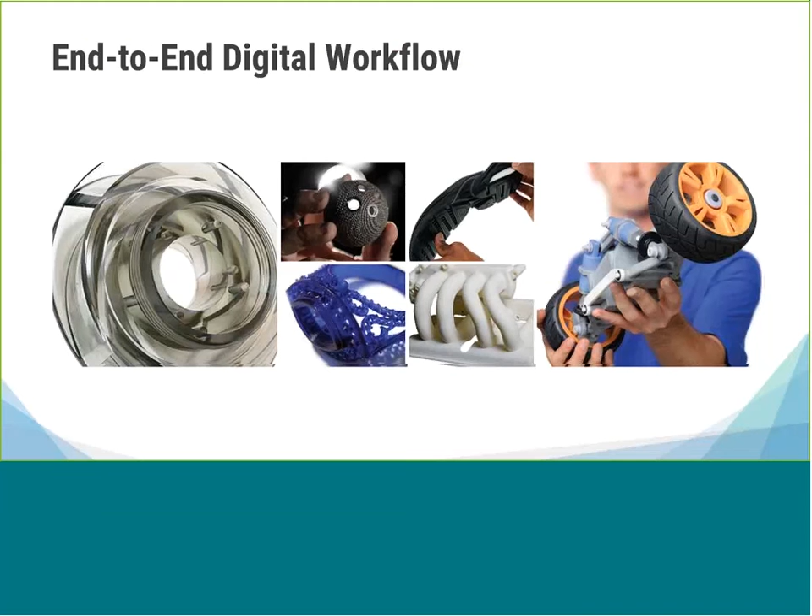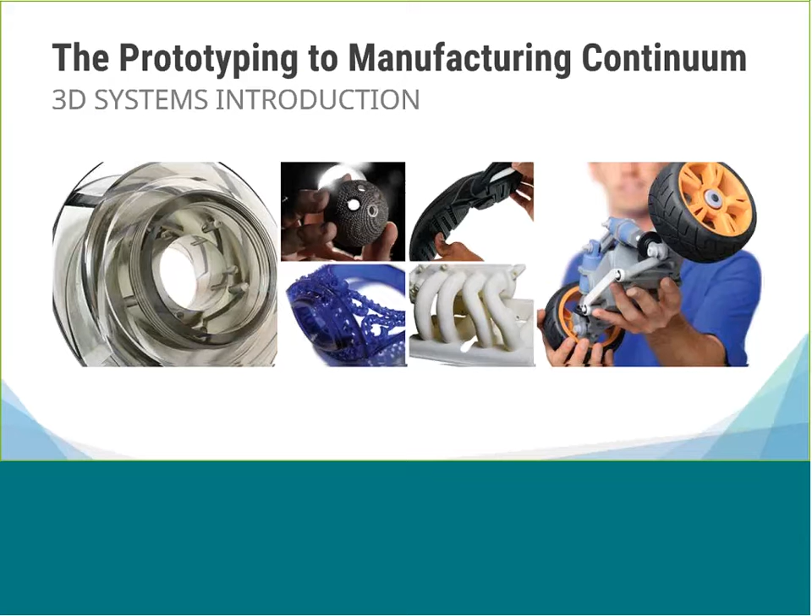And just before we get started, we also will be covering our end-to-end digital workflow: digitize, design, simulate, manufacture, inspect, and manage. You'll learn how 3D Systems is a full-service provider.

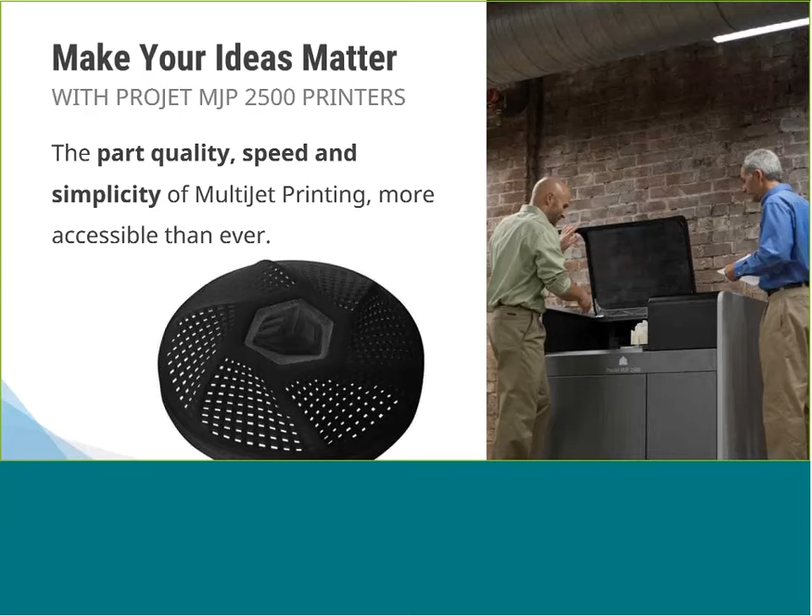Today, we're going to focus on the multi-jet printing technology. I'm going to talk a little bit more about what that means and what it is. And specifically, within the MJP family, we're going to talk about the ProJet 2500 3D printer. And we're going to focus on some really key advantages within that printer family: part quality, speed, and simplicity. And it really gives those that are looking to get into 3D printing that accessibility even easier than before.

So let's talk a little bit about the ProJet MJP 2500 and different ways that people are using that printer today. The printer is designed to create precise plastic and elastomeric models and prototypes, primarily for concept models, whether it's an industrial engineer doing rapid design iteration or creating communication and sales tools, models for visual inspection and verification, or architecture, engineering, and construction models. The printer is also being used for functional prototyping, design verification, and testing.

And I'll give you an example. During a customer visit, I was able to see what a customer was using their printer for, and they are creating camera housings. They were able to create a very precise camera housing and do underwater testing using the ProJet 2500. They printed out a main body as well as several accessory parts that they were able to bolt together with glass and submerge in water over a weekend. So this allowed them to test the design for water tightness and get feedback very, very quickly and very, very efficiently.

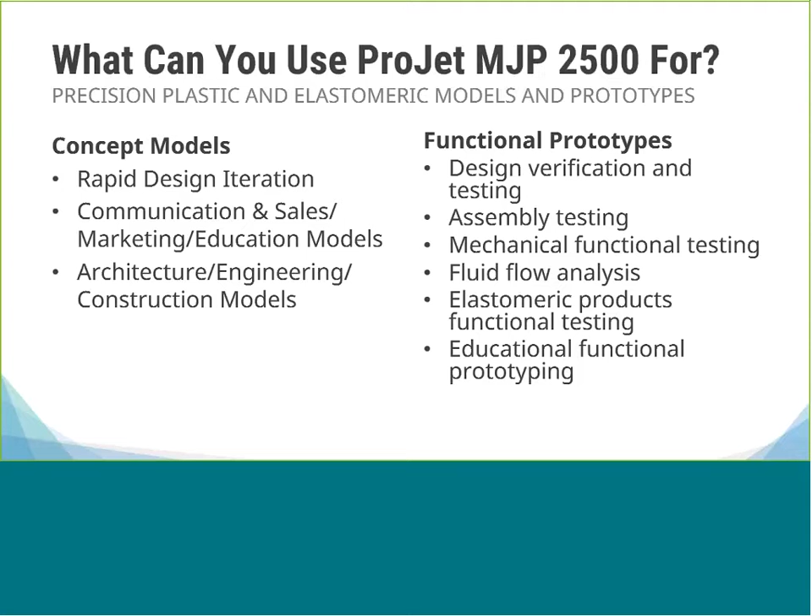Other types of applications include, of course, assembly testing, like I just described, mechanical, functional testing, and fluid flow analysis. Because the ProJet 2500 can run elastomeric materials, that opens up other applications that require an elastomeric material, as well as educational prototyping in various educational and training institutions.

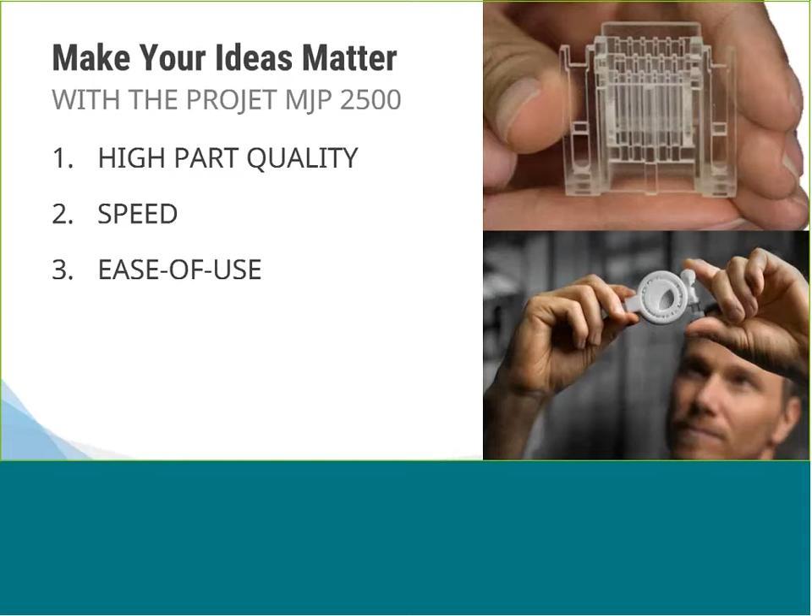So, like I mentioned, we're going to focus on 3 key advantages with the ProJet MJP 2500, and that's part quality, speed, and ease of use. And I'll go into more detail into each and talk to you about why those matter and why those are important.

This department receives prototyping requests from various functions within the company. So they're the model shop, and they have a number of different technologies that they run, from our 2500 all the way up to high-end SLS printers.

So during their time using this printer, the other departments actually started to request parts off of this printer because they had become accustomed to the part quality, to the performance of the materials, and they liked it so much that when they placed orders for new models, they were actually requesting models off of this printer. So it's just another testament of the versatility and the various application roles that this particular printer can fill.

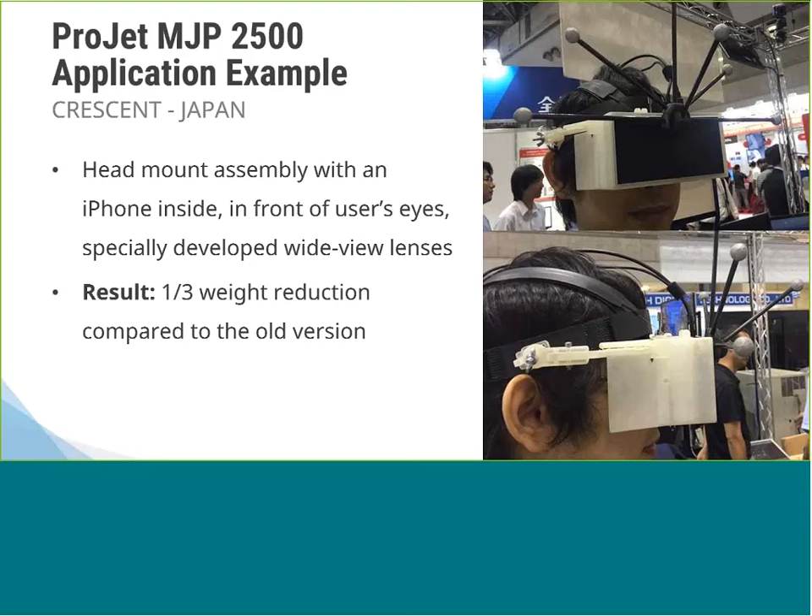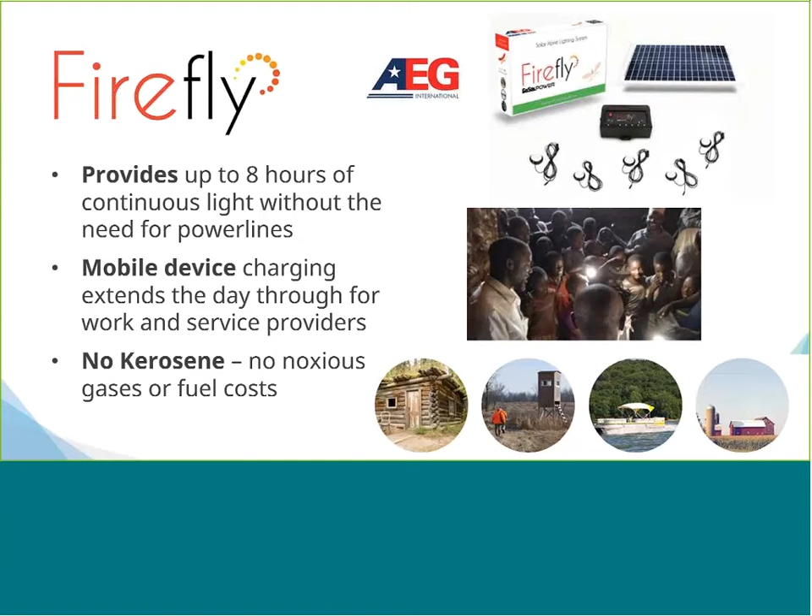And another recent application success story is with AEG International, in partnership with one of our authorized partners, Duncan Parnell. The new product is called the Firefly, and it's a solar-powered bank of LED lights. And as you can imagine, this is extremely important in regions of the world that do not have very extensive electricity grids. And so with this being a mobile device and being a solar device, it's extremely green and eco-friendly and does not require gases or expensive fuels.

Now, AEG was able to use their Projet 2500 to prototype the case for the new Firefly. And they chose the 2500 because of the accuracy, the part quality. They were using our clear material, so being able to have strong, clear parts, very easy to use with the melt-away wax supports, and we'll talk more about that in a little bit. The platform size was actually large enough to allow them to create full cases that they could then assemble and test. And then the print speed allowed them to very quickly iterate and get several models out for quick verification.

And so just another quote at the bottom: the Projet MJP 2500 works very well and meets our goals, provides design flexibility and high quality parts that save time and cost. And that was from Scott Drayton, the VP of Engineering. So we're really excited about just a few of the success stories that we've received back from the field concerning the Projet 2500.

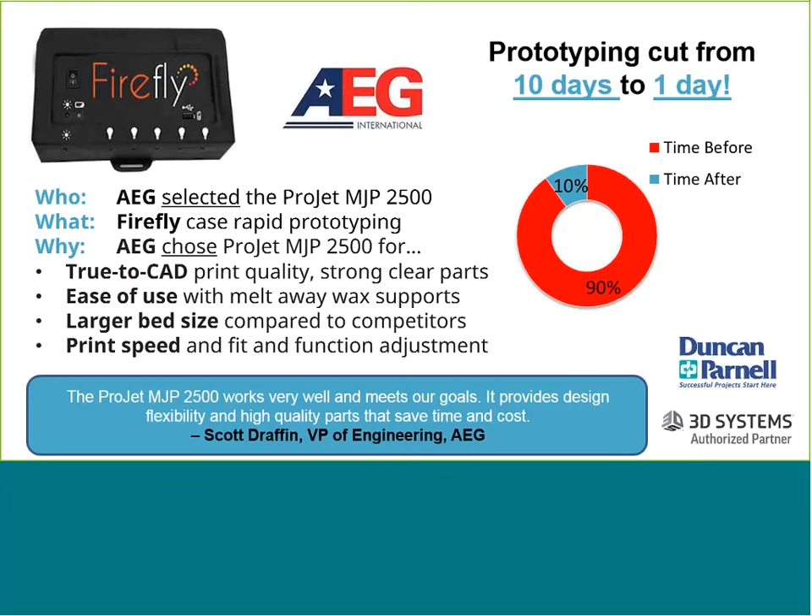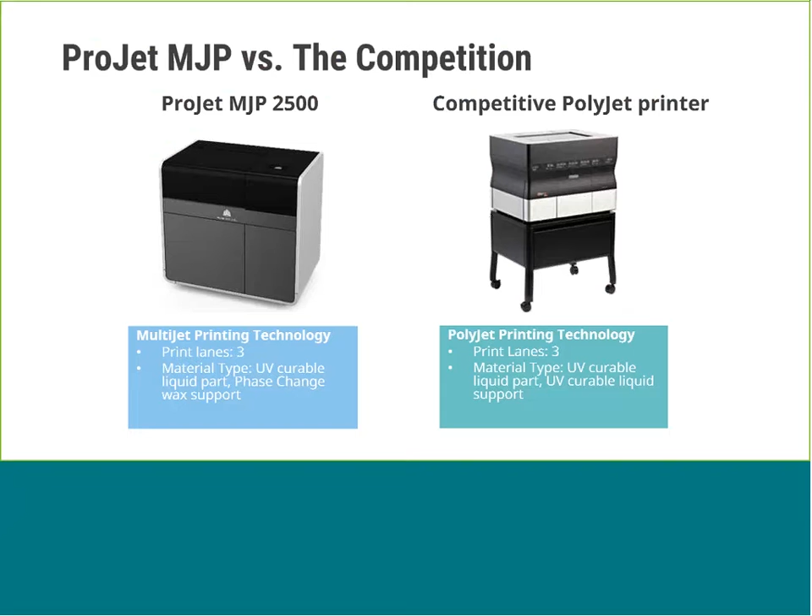So now we're going to talk a little bit more specifically about why those 3 key elements we mentioned are so important versus similar technologies. So there are other inkjet printing technologies, and we want to talk in detail about how the ProJet MJP 2500 matches up against those technologies. So first we're going to talk about part quality and true to CAD accuracy.

To start, I want to explain the technology differences. A lot of people have a misconception that all inkjet printing is the same. So I want to very briefly describe the difference between the print process for MJP and some other technologies. So with MJP, we are actually printing with a phase change material. Phase change basically means it can go from a liquid to a solid by heating and cooling. And why that's important is because every time we jet a droplet of material, we have control over that material. When it jets, the phase change support material allows a stability for the part material until we can actually UV cure that layer.

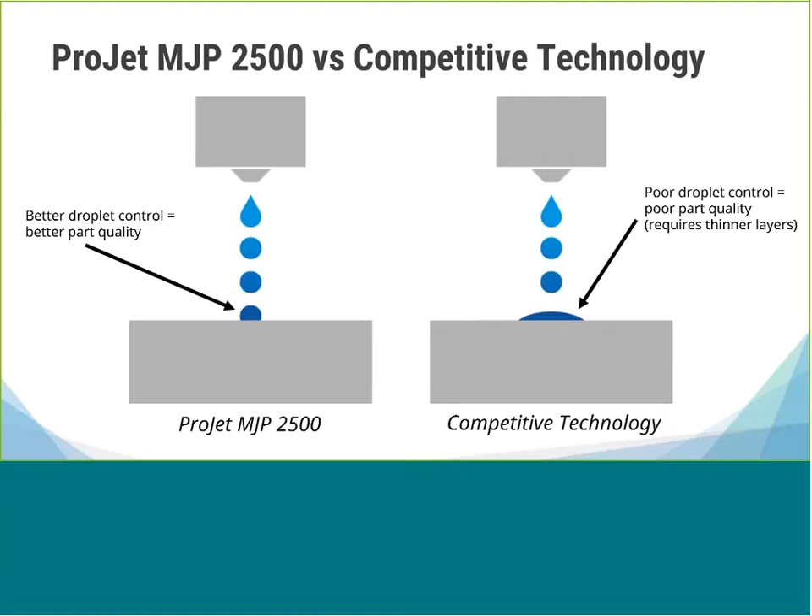Other technologies utilize a non-phase change material, which means it's liquid at room temperature, it's liquid when you jet it. And so if you can imagine pancake batter and how it spreads until it cooks enough to stop spreading, that's what happens with other inkjet technologies that use non-phase change material. Now that's a very technical explanation, but the next slide shows you what that means in terms of part quality.

So if you look at this very simple part of a threaded screw, you can see a very stark difference between the MJP 2500 part and the competitive part. Sharp, accurate threads, which are very important when you are assembling a part that needs a thread, or you're assembling a part that needs to fit into a groove or fit into another space. Those kind of details really matter.

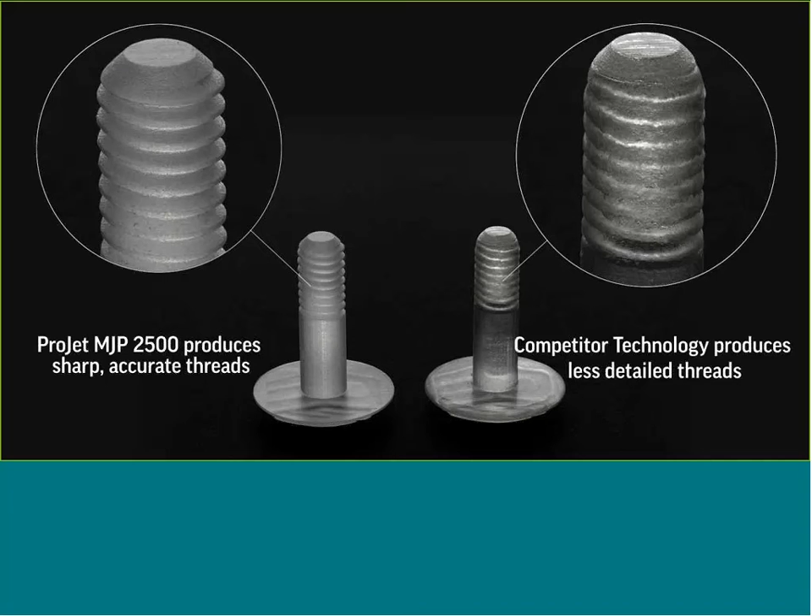Here's another example of a ProJet 2500 part versus a competitive part. And if you look at those top two features, the detail and the sharpness is drastically different. And that's very important. Every detail on a part that an engineer designs is important. It's not arbitrary, but it's meant for a purpose. And so as an engineer, if you're designing something, you expect your 3D printer to be able to keep up with the sophistication and the precision of your design.

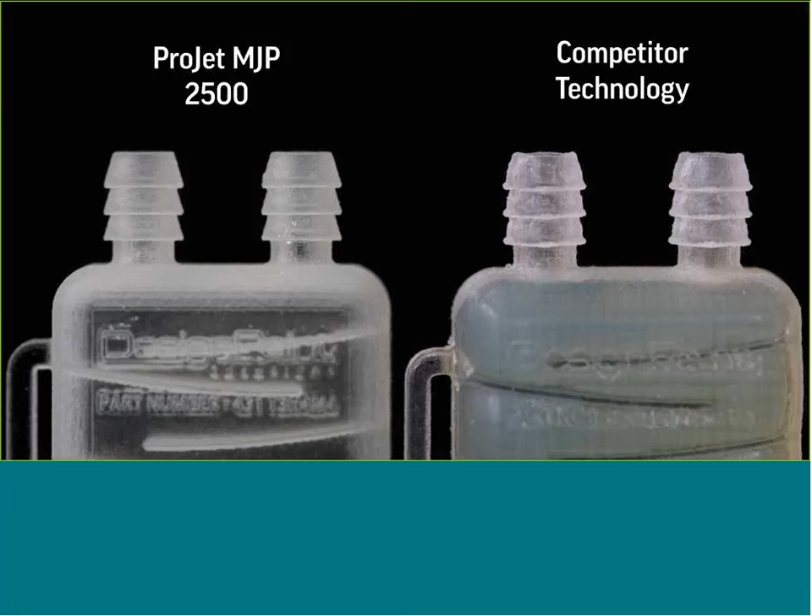Here's another practical example, because a lot of times other technologies and other printers, their position is that, well, it's good enough. You know, the part quality is good enough. So I want to share an example about how good enough can actually cost you. So if you look at the bottom left, there's a typical shower head. And inside that shower head are various nozzles and jets. And those nozzles and jets are meant to create certain spray patterns.

So we modeled a CAD model of the middle pattern on that shower head. And we printed the parts out on the 2500, printed them out on a competitive printer. And the results in the upper right-hand corner images are pretty significant. So the spray pattern that is expected is not what is provided by the competitive printer. And if you look at the detail of the actual nozzle openings, they're designed to be very small triangles.

But on the competitive technology, those edges and those points are rounded out. That is what's affecting the spray pattern. The spray pattern is actually not fully open and allowing the water to come out. So that's why the details and the precision of how a printer can resolve a CAD model are so important.

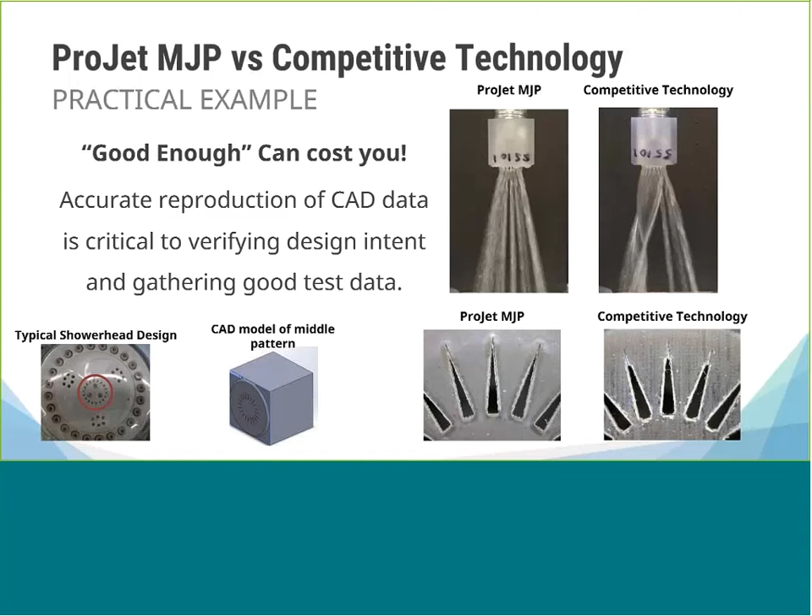And here's just another visual example of how high part quality can deliver results that you can trust. In the example on the left, that is a fully functional bearing with ball bearings on the inside. On the right, that ball bearing is completely frozen and not fully functional. And so again, based on the design, you want your design to perform as you designed it and as you intended it. And the ProJet 2500 is able to deliver that.

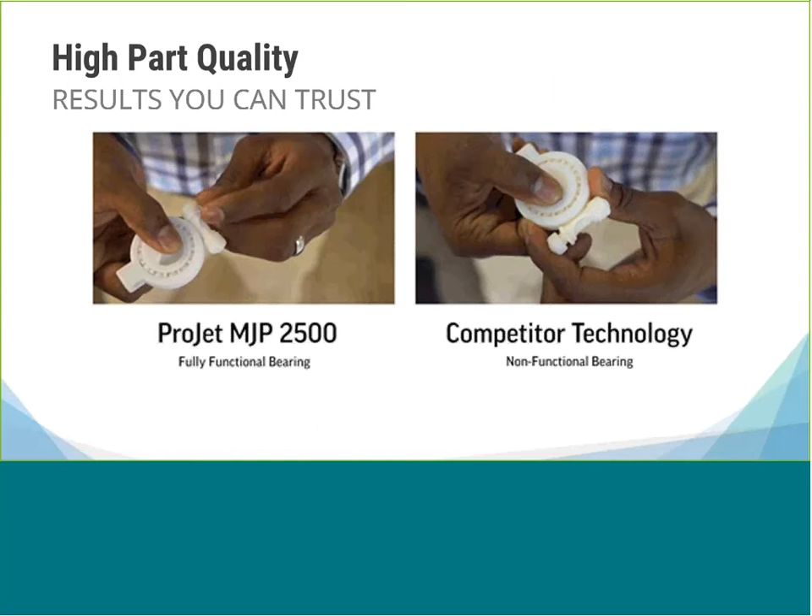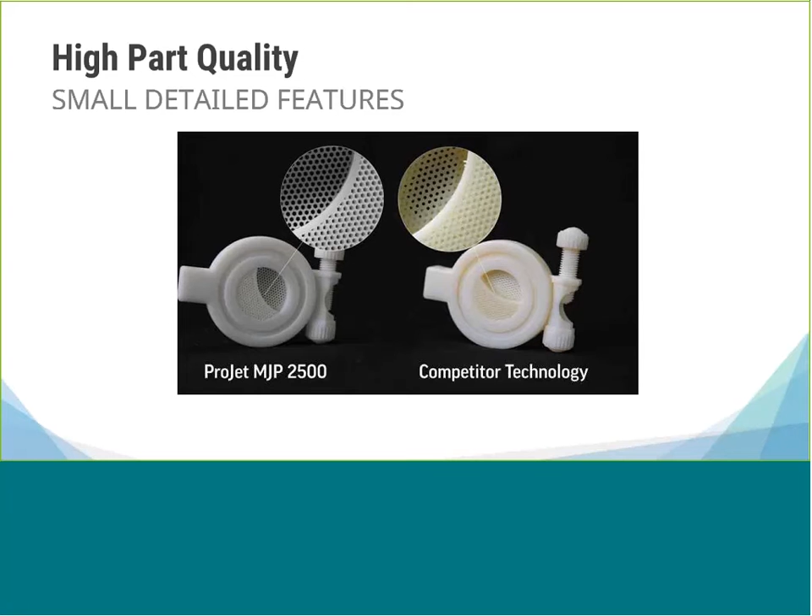Here's another example, just looking at small detail features. From the magnified images, you can very clearly see the 6 sides of the hexagonal pattern that's created on the inside of that part. On the competitive part, it looks more like irregular circles, some of those not being completely resolved through and through. So again, it's important that when you're designing parts, you have a printer that's able to support your design.

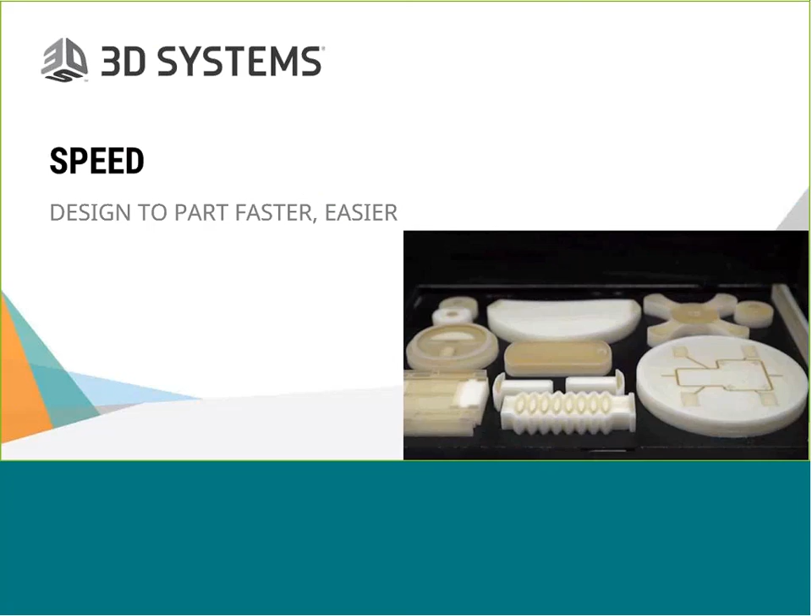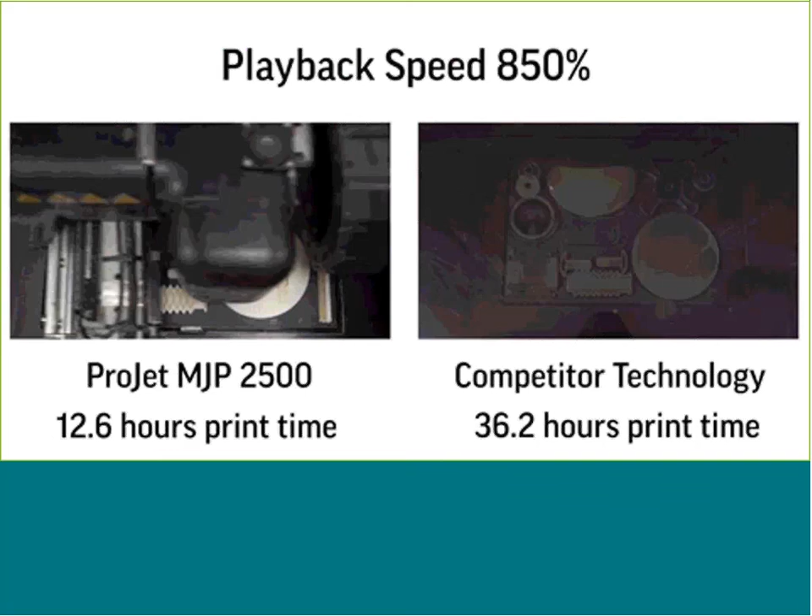Now we're going to talk about the second key advantage, which is speed. And ultimately, it's design to part faster and easier. So in this example, we took the same build and we printed both builds on the two different printers. And you can see the difference in print time. This is total print time from beginning to end. The playback speed was accelerated, but you can see a 12-hour print time versus a 36-hour print time.

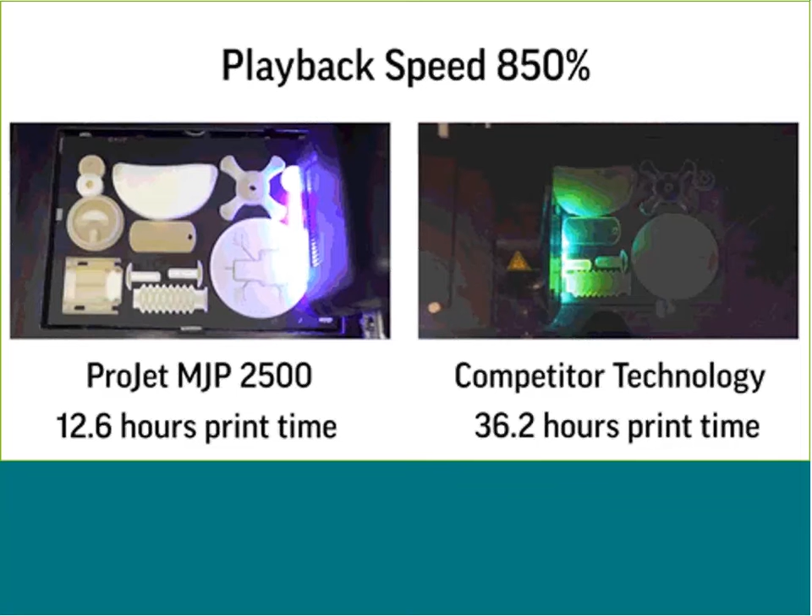And that's really important because if I need those parts on a manager's desk within 24 hours, I'm able to start that print at 8 a.m. and walk in the next day and be ready to start cleaning. Whereas on the competitive printer, I've got a full 24 hours plus some just to finish the print. So being able to print lots of parts as quickly as possible allows engineers and designers to get their designs into their hands, iterate faster, and design and develop products faster and more efficiently.

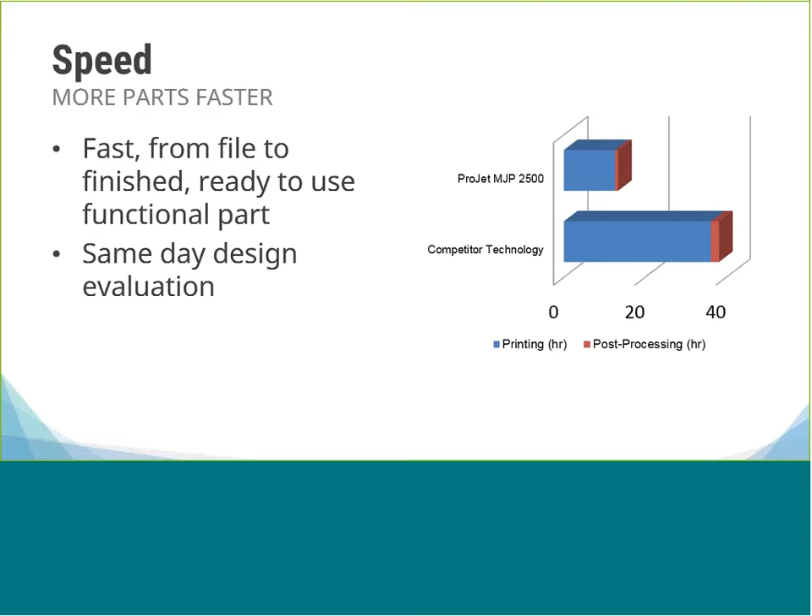So speed is not only just about print time, but it's about all the other processes that are involved when going from a design to a finished part. And so from file to finish, we're very competitive as it relates to having those parts in your hand. So when you look at this graph, the total printing time plus the post-processing time is significantly shorter using the ProJet 2500. And in a minute, I'll talk a little bit more about post-processing. But again, this allows engineers and designers to iterate and evaluate, make changes, and continue that process a lot faster using the ProJet 2500.

So the third key advantage that we're going to talk about is ease of use and post-processing. And so everyone who's running 3D printers wants to work less, but also get the best results possible.

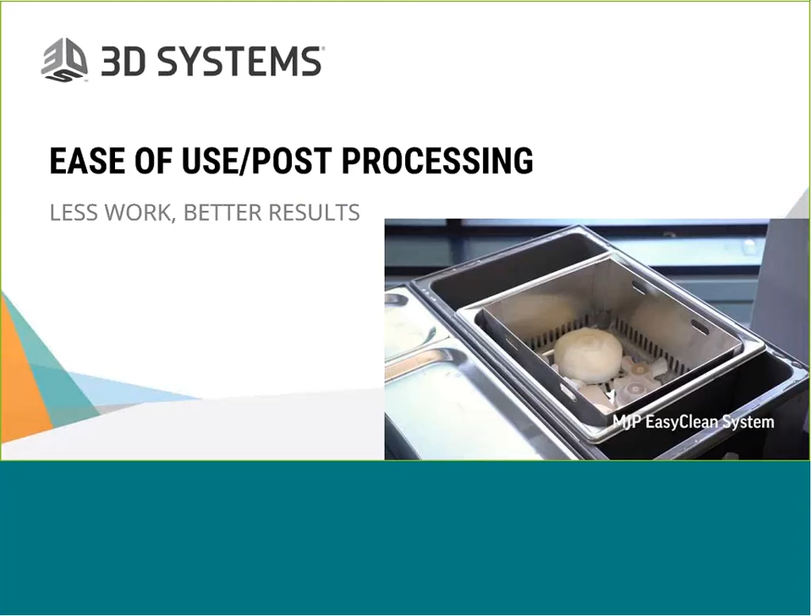So this year we launched the MJP EasyClean system along with the 2500, and this system is a very simple steam-based wax removal system. It is extremely easy to set up and use, very minimal handling of parts, and extremely fast for batch cleaning. And batch cleaning is really important because most people are printing multiple geometries. They have a number of parts that they're going to need to clean, and they want to be able to get through that process as quickly as possible.

The MJP EasyClean system allows you to put all of the parts on your build into the cleaning system and move it from step to step in one batch. And so from 0 to finished parts, you're able to have all those parts ready to go within a short amount of time.

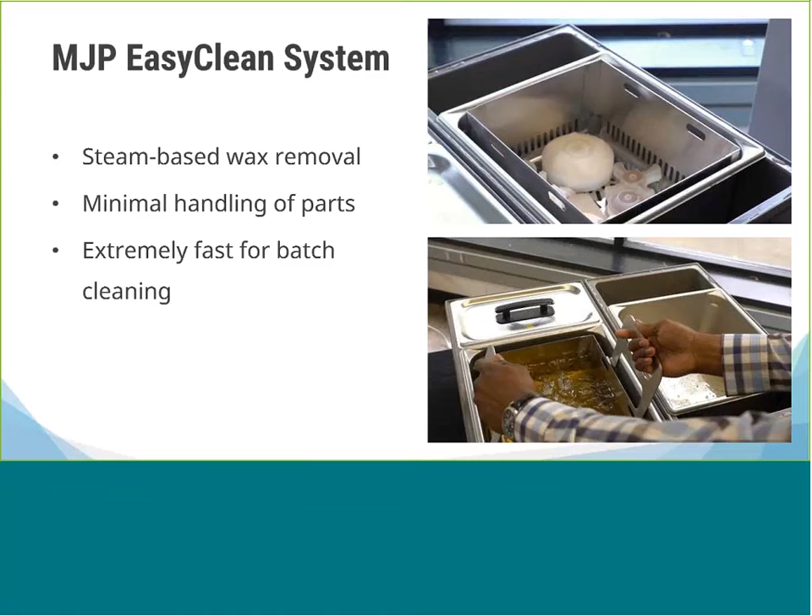In contrast, our competitive technologies use a water dispersible support, which requires mechanical action. Now, the mechanical action of the water is extremely high pressure and can potentially damage very delicate parts. This is a rigorous process of holding a high pressure wand in one hand, holding your part in the other hand, and blasting all of the support off the part.

It's time consuming. It's impossible to do batch processing. You pretty much have to handle each part one by one. And then there's a process of going back over the part to make sure that you were able to remove all of the support completely. So this is a very laborious, iterative process just for post-processing and getting to a usable part.

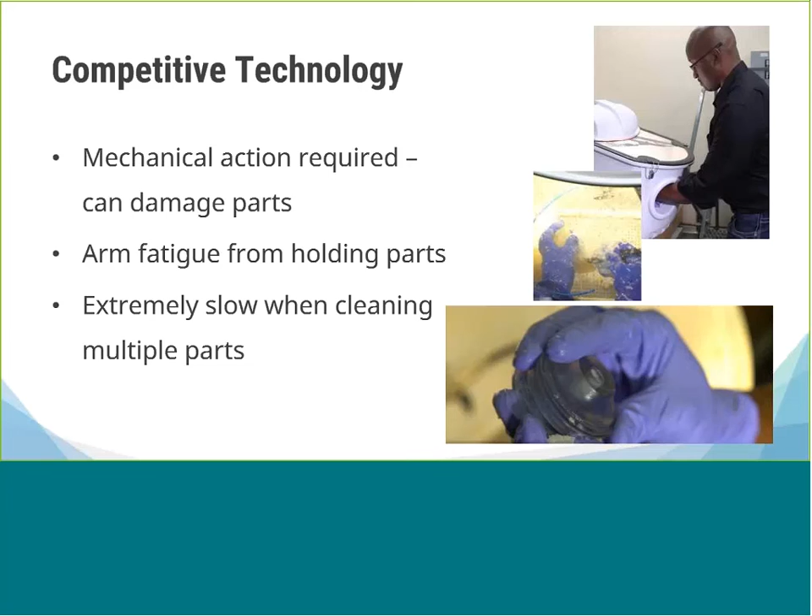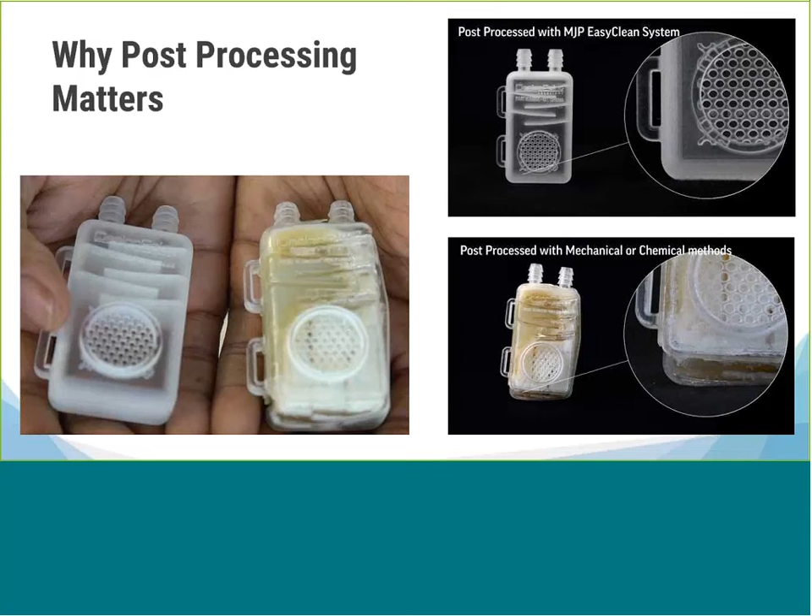Think about or imagine all of the different geometries that you could design for your particular product. You don't want to be limited by the post-processing method of the 3D printer. You want to have complete design freedom and be able to design parts that are intricate, that have internal details, and to be confident that you're going to be able to get all of the support material out and still have a high-quality part to use for prototyping.

So let's talk a little bit about some of the product specs for the ProJet 2500. We offer two models of the 2500, the 2500 standard model and the 2500 Plus. They both have the same build envelope capacity, but they differ in the materials that you can run. So the MJP 2500 runs two of our rigid materials, the rigid white and the rigid black. The 2500 Plus runs all 5 of our materials, which includes 3 rigid materials as well as 2 elastomeric materials.

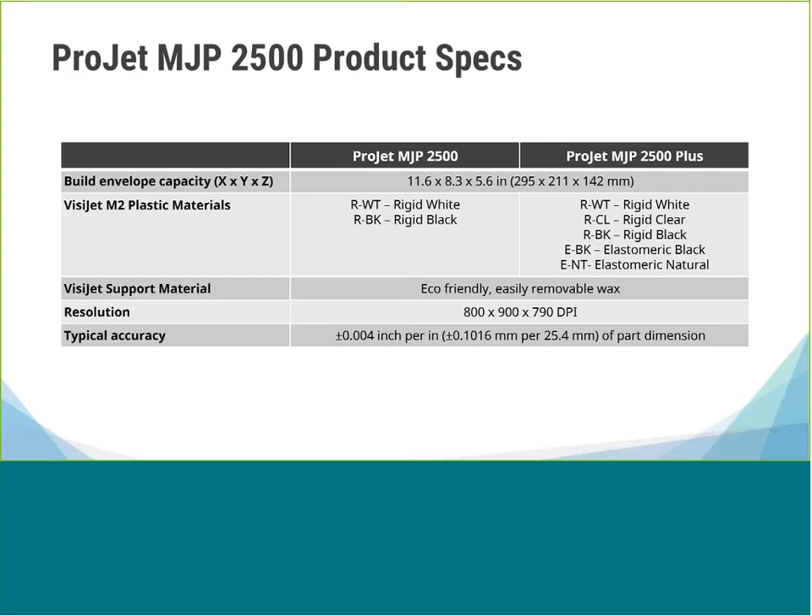Both models use our very eco-friendly support wax, and both models have a resolution of 800 by 900 by 790 dpi with a 32 micron layer thickness. So a little bit more detail about our plastics. We have 3 rigid plastic materials. We have a rigid black, rigid clear, and a rigid white. And they're all useful for different reasons and for different applications.

Applications that are looking for something that looks like injection molded plastic, like cases and housings, the rigid black works really, really well. The rigid black is also the most balanced in terms of mechanical properties, with a moderate tensile strength and elongation profile. The rigid clear is a high transparency plastic. It is fully sandable, polishable. You can polish it, sand it, clear coat it for very high clarity results.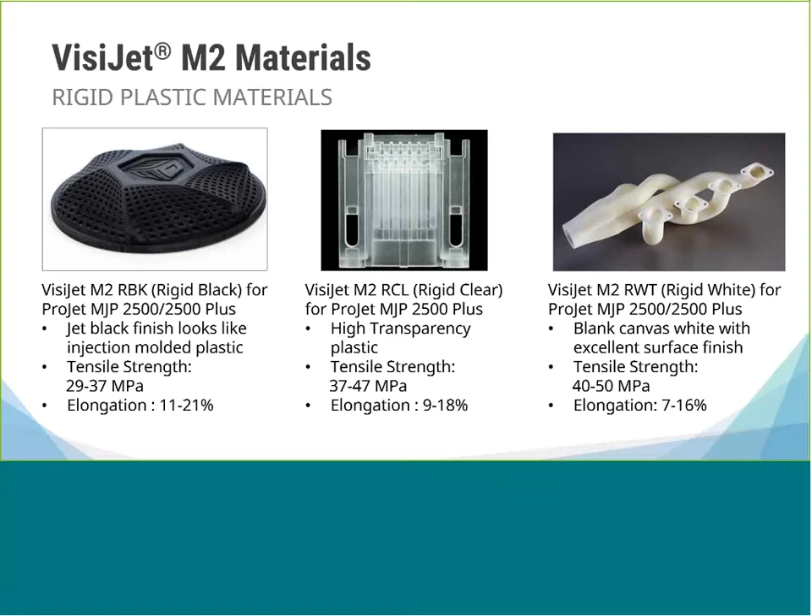The rigid white is kind of our blank canvas and is actually one of our most popular materials. It's got a really high white finish, extremely smooth surface finishes that can be produced, and it has really high tensile strength. So from a mechanical standpoint, these materials perform very, very well in a number of different applications as it relates to concept modeling and prototyping and functional testing.

We have 2 elastomeric materials. We have VisiJet M2, the elastomeric natural, as well as the elastomeric black. Both are very flexible. The elastomeric natural works really well in medical modeling. We have some customers that are creating prototypes of human anatomy and report that the softness and flexibility of the material allow them to simulate human anatomy. So it's a great application for that particular material.

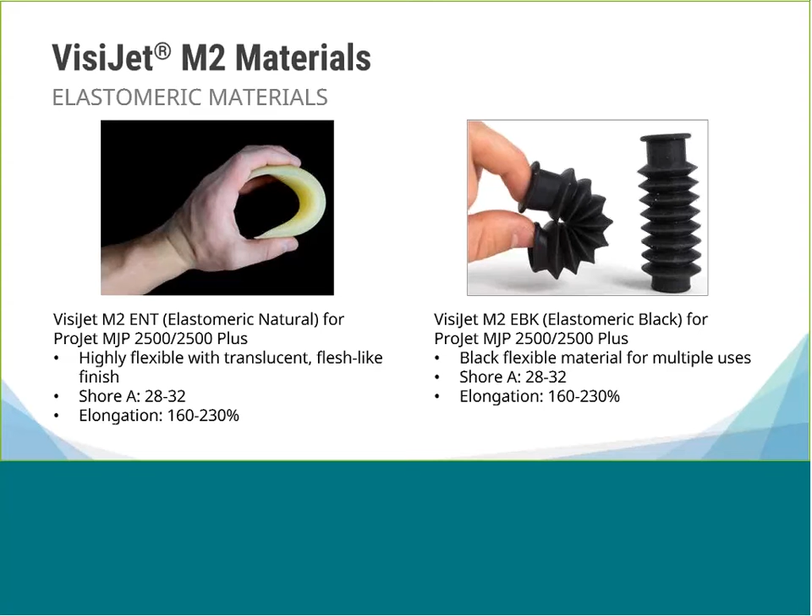The elastomeric black is used for multiple applications where people need a soft elastomeric material, such as gaskets, bumpers, and other applications.

The 2500 ships with 3D Sprint client software, which is one of our most powerful, easy-to-use client software. This software allows the user to very quickly upload their file. Multiple file formats are accepted. They can upload their file. They can check and repair their file. They can do moderate CAD work within 3D Sprint to get their file ready for printing.

The software provides build time and material estimations. You're able to switch from printer to printer, and so it's very feature rich, and it ultimately allows the user to get in and out and submit their build to printing very quickly.

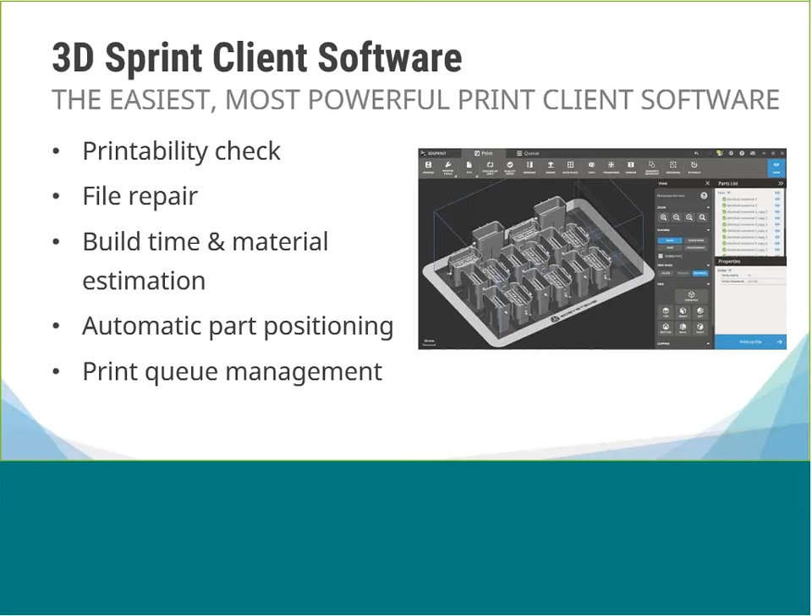So guys, in summary, again, we're really excited about the ProJet 2500 and making your ideas matter. It is definitely a strong contender in the market with providing exceptional part quality, blazing speed, and simplicity, not only in operating the printer, but also in removing supports, setting up builds, and overall function and operation of the printer.